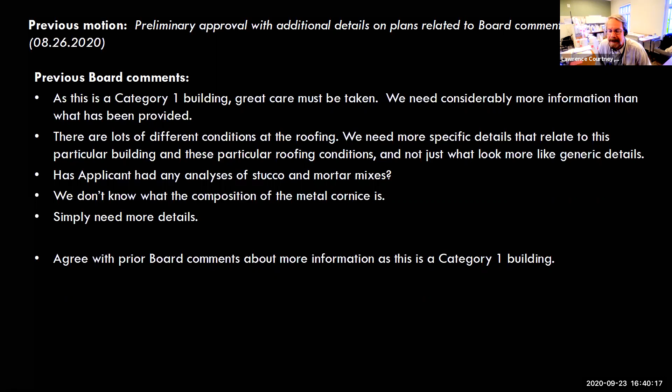Staff comments from that meeting include: this is a Category 1 structure and any work must be considered carefully. It should be noted that the condition of the roofing varies across the shown locations. A more detailed evaluation of the existing conditions should be well documented, and if found to be historic, the Secretary of the Interior Standards for the Treatment of Historic Properties, as well as the National Park Service Preservation Brief number 29, the repair, replacement, and maintenance of historic slate roofs should govern.

Also, it was commented that while there is no information given on the roof, the previous staff comments indicate that it is likely of Hurricane Hugo era vintage. If further investigation finds it to be historic, the roofing should remain and be repaired in place to the extent possible per the documents noted above. If removal is necessary, it should be done carefully with the reuse of as much of the existing slate roofing as possible, supplementing it with similar material.

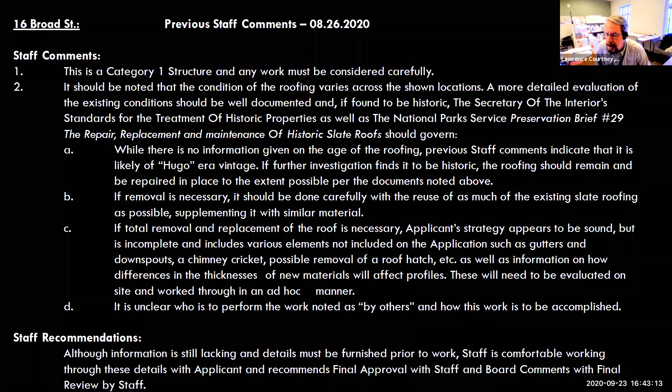And with that, I will turn it over to Mr. Johnston.

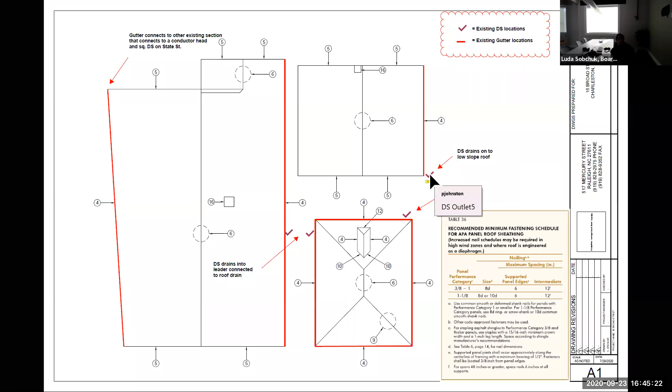There is also one other downspout on the hip roof section at the northeast corner, which also drains into a low slope roof drain and is not visible from the ground. The east side of that small section in the top right corner has one downspout that drains onto the low slope roof there, which would also be replaced. That is possibly visible from the street, from East Bay Street, but I was not able to see it from the street given the trees at the time I checked it out last week.

Other details have not changed. The detail page originally provided contains specific details to this project taken from measurements we took on site. The part of the scope that says work to be done by others, we have addressed that.

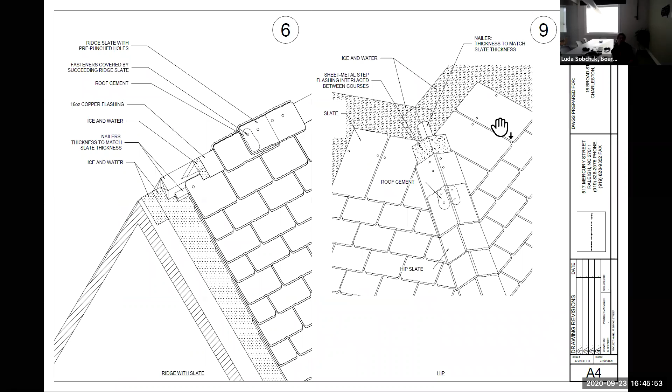Mashburn is actually not going to be doing any physical work. Anything having to do with additional work would be masonry and/or stucco, and that will be handled by our in-house restoration department. I was on site today with Jim Smith from our restoration department to review what we found there.

There's only that one center roof, hip roof area that has bricks below the drip edge. Given the current condition, we don't see any need to replace bricks where the drip edge goes. There are two small cracks at each end, which may be filled or repaired using Type O mortar in regards to National Park Service standards for masonry repairs.

The other roof section that has a stucco chimney will most likely need repairs. There are some previous repairs done poorly there, not by us or anyone we know currently, but repairs will need to be done for the step flashing and the previous work, using stucco approved by National Park Service standards for stucco repairs.

This is not my field or my scope. Jim Smith, who works for Baker Restoration, knows this quite well and is very familiar with these processes. So anything that needs to be done would be run through him in order to be completed.

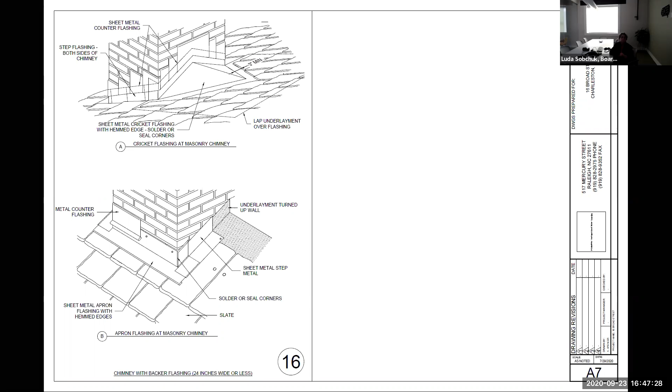Otherwise, there's really no change. We still intend to remove all the slate and replace it with new Buckingham slate for a couple of reasons: warranty, unknowns as far as what we can reuse, and possibly costing the owner more money because we've had to buy more slate. Overall, cost makes much more sense to replace all of it and know that we have a warranty and a well-installed roof.

As far as differences in elevations or planes, there shouldn't really be anything noticeably different. There's a half-inch layer of CDX being added. That will be accounted for around one brick chimney with new step flashing and counter flashing, as shown in detail 16.

As well as one dormer on the hip roof area that has slate on the sidewalls, but that slate will be replaced also, with new step flashing there as well. Overall, I believe that is all the details we need to provide. We have good details on the valleys, drip edge attachments, counter flashings, crickets, and gutters as well. We look forward to getting this project started.

Great. Any questions from the board or staff?

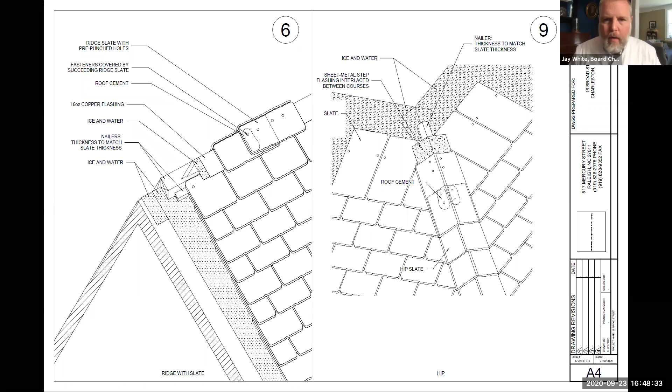You mentioned that you had someone on your staff that knew about this historic work, but the mortars, stuccos, and materials need to be approved by the staff, not by your in-house person. So that needs to be submitted for approval to the staff, Peter.

Okay, we don't really have a way to get at that area right now. Not having it, no, just when you get to it. Okay, yeah, I understand what you're saying.

I had a question for city staff. This is rated as a Category 1 property. Have we determined why that is, what the rationale for that rating was? I did ask Ms. Bennett about that, and she said it was largely due to the ages of the buildings, and that there was likely something historic that happened here. We aren't quite sure what that might have been at this time.

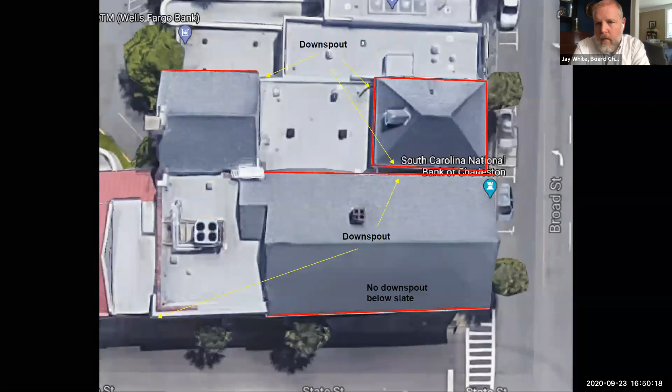Any other questions from the board or staff? All right, hearing none. Any public comment on this application? No public comment on this one. All right, what's the city's recommendation?

Well, these are very similar to last time's. This is a Category 1 structure, and any work must be considered carefully. It has been noted that conditions of the roofing vary across the shown locations. A more detailed evaluation of existing conditions should be well documented as the work progresses, and if found to be historic, the Secretary of the Interior Standards, as well as the National Park Service Preservation Brief number 29, the repair, replacement, and maintenance of historic slate roofs, should govern.

While it is believed that the roofing is largely of Hurricane Hugo era vintage, if further investigation finds portions to be historic, the roofing should remain and be repaired in place to the extent possible per the standards and brief noted above. If removal is necessary, it should be done carefully with reuse of as much of the existing slate roofing as possible, supplementing it with similar material. If total removal and replacement of the roof is necessary, the applicant's strategy appears to be sound.

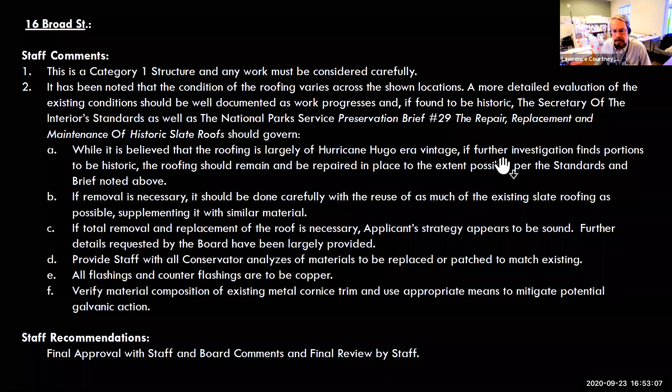Okay, Mr. Johnston, do you have any clarification you'd like to offer to the city recommendation? No, I will say we had an asbestos test done on underlayments. They were not found to be asbestos containing materials, for whatever that's worth as far as the age of the roofing material that's on there. There have been numerous repairs done, so some look a little different in areas, but overall the roof is pretty much all the same slate and condition.

As far as the cornice, I was looking at that today, also this afternoon. Currently, the way the cornice is installed and the way the current drip edge and gutter is installed, there is no actual connection between the two, which we would intend to keep with the new gutter hangers and drip edge. If it was found that it somehow was going to connect, we would find a way to mitigate that and put a slip sheet between the two to reduce the chance of reaction. But from what I can see on site, there is no connection between the two currently. All flashings, as you said, are spec'd with copper. I don't think there's anything else I really need to clarify for that.

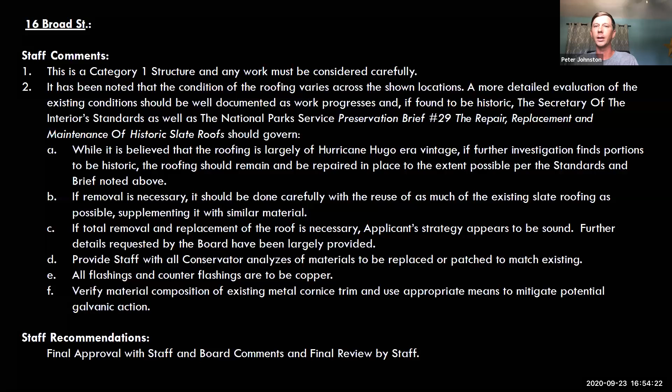Okay, thank you. All right, board discussion. Do you want a motion, Jack? Yeah, that'd be fine if you want to introduce a motion. I make a motion for approval, final approval with staff and board comments and final review by staff.

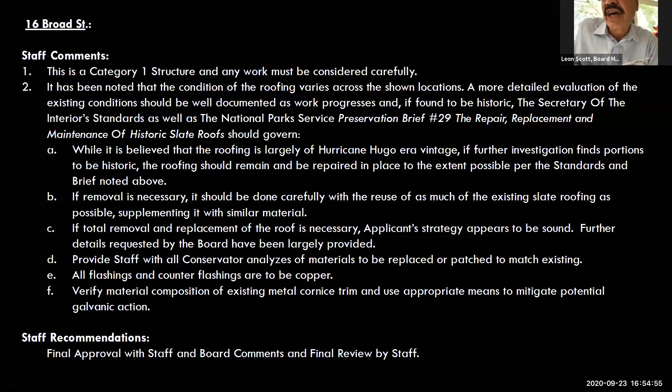This is Leon Scott, I will second that. Okay, so we have a motion made by Mr. Metters, seconded by Mr. Scott, for final approval with staff comments and final review by staff. Made and seconded. Ms. Sobchuk, how do you vote? Yay, in favor. Mr. Scott? Yay, in favor. Mr. Metters? Yay, in favor. And I will vote yay in favor as well. The motion carries 4-0.

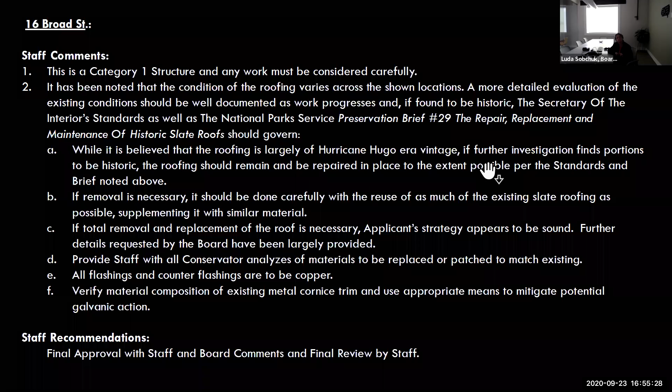Second and last on the agenda for this evening is 480 East Bay Street, requesting conceptual approval for renovation of the east portion of the building and a new plaza along the north portion. This is not rated. It's not in a specific neighborhood. It is circa 1944 to '51, as well as post-1955. It's in the old and historic district.

This is a site context photo looking at the site towards the east from East Bay Street. This is the eastern portion of the building that will be renovated. The plaza is in this area right here. And this is the east portion of the building to be renovated. It is now a dry cleaners. And with that, we will turn it over to the applicant.

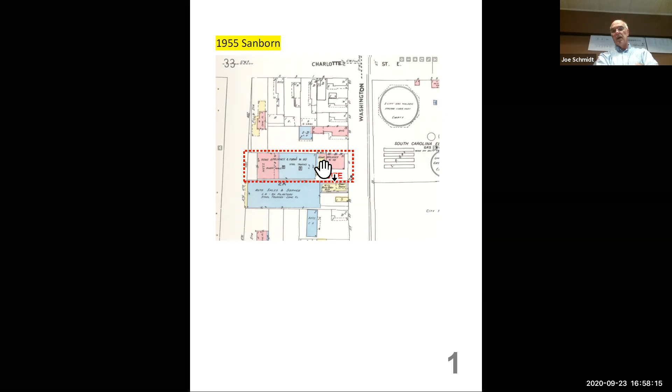Joe Schmidt, Evans and Schmidt Architects. This property is on East Bay. It's bordered by East Bay, Charlotte, and Washington Street. It is adjacent to the Gateway office building, which is a complex of two buildings on the corner of East Bay and Calhoun Street.

With the advent of COVID, things have changed, and we're trying to adapt this shopping center to meet those changes in the future, bring some life back to this property. What we propose to do, after checking with zoning, is remove 11 parking spaces directly up against the building. You literally pull your car bumper all the way up to the storefronts, and it's not very appealing for anybody else coming into the spaces.

At the same time, the dry cleaner asked to close their business, and that gave us the ability to pursue this as a pedestrian interaction plaza, where the 11 cars are being removed, and convert the dry cleaner into 2 retail spaces. The ultimate goal is to breathe life into this property and put in, hopefully, tenants who will support the day-to-day needs of the tenants in the office building. In other words, we're specifically going to be looking for coffee shops, small groceries, vegetables, anything, and a dry cleaner again - anything that's conducive to helping those tenants want to stay in that building at Gateway.

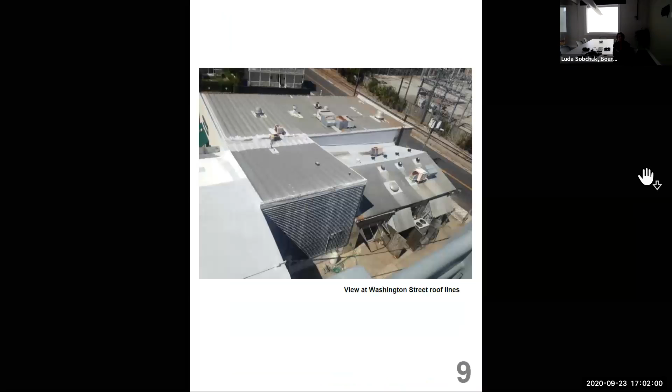If you will go to panel 12 - this is probably the quickest and easiest way to understand what we're talking about. You can see where we've taken out the parking spaces, and we've got patterns of brick pavers to be put down in that location. Now, we do not have the elevation to create a normal plaza where we're stepping off the sidewalk or plaza 6 inches down onto the parking lot, because the parking lot is dead level up against the building, where you just walk right into it.

So we're actually going to have to remove the asphalt and let the brick pavers in flush with where the asphalt is now, with a slight rise to it. But that meant at the outer face along the 3 arrows that say plaza renovation, we needed something to keep cars from jumping up and hitting anybody on our plaza. So we came up with the idea of putting in canopy shading devices in planters, and those planters serve as our bollards, as our definition wall from the parking lot.

So anybody that pulls in too quickly doesn't jump up onto our plaza, because the best condition we could possibly get is about 2.5 inches difference between the height of the asphalt in the rest of the parking lot and our plaza. Otherwise, we'd be tipping the water back toward the building. So every one of these was sequentially a generator for what we're trying to propose to do here.

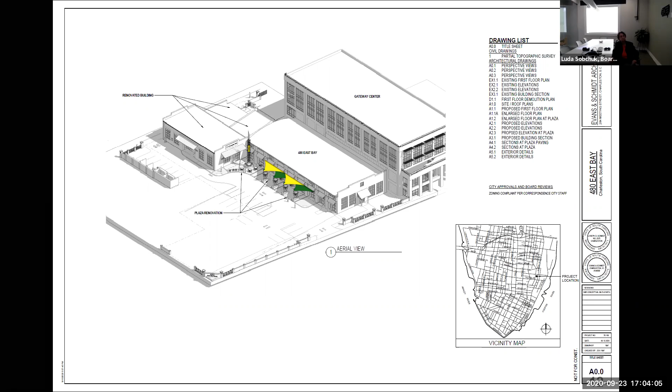In the corner, the inside corner there, we wanted to put in something to signify this property. This is all owned by John Rivers Foundation. They were Channel 5, WCSC, and the radio station. They've been across the street since the inception, the first broadcasting company in Charleston. So that is a cultural type piece to help draw attention to the site and designate this property as being part of it.

It's meant to actually generate some questions - what is the purpose of that, why is it there, is it just purely sculptural? It's sort of a token representation of the family's business, which we'll show later in the presentation.

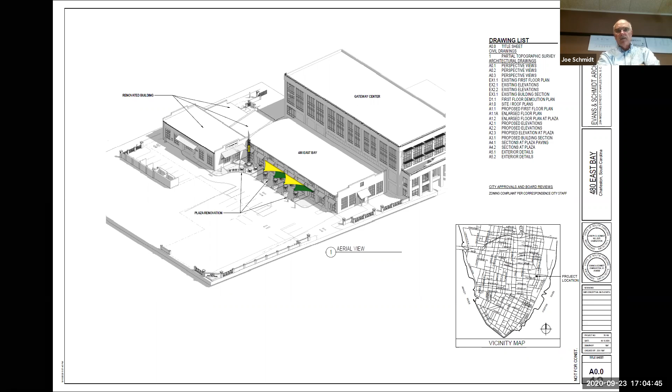The arrows you see - this really doesn't show it. Let's go to 14, panel 14. One more, there you go.

The block wall you see, the stucco wall on the top of the screen, that is an existing wall. It's stucco with pilasters and little cast balls on top of them. We're leaving that piece of wall, but taking out a small section of it.

Here's where we're starting to replicate the fence work, the ironwork, and the stucco of the gateway down the way. It has that same X pattern, similarly to the one in front of the bank, which remains up on the corner to the right side of the top of your screen. This is not part of that project - that's intact, except we're proposing that fence work.

That's correct - these are the same curb cuts coming into the property. In any case, we're changing the look of the east end by putting on a fixed canopy in that location and a parapet pop-up on that building to give it some prominence. That will house two different establishments. We also have a similar awning on the side of the building, as shown to the far left on the bottom of the screen.

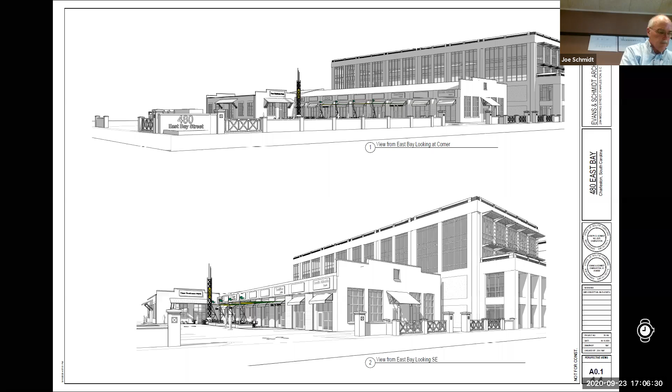I'm thinking there's a better place to look at that - well, go to 15, if you don't mind. A little closer, that's okay. This is jumping, that's not me - it's usually me doing this. All right, let's try something else here because it's not really wanting to stay on that slide.

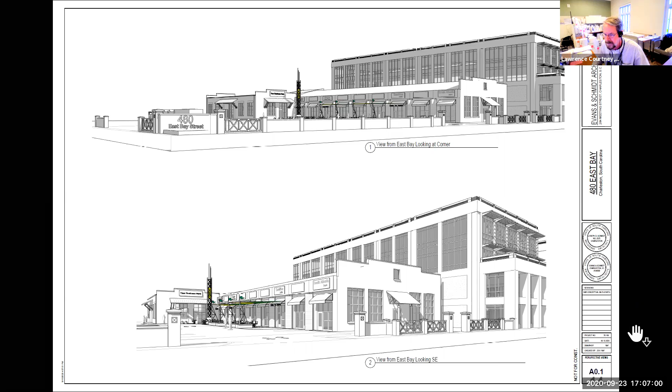There you go, it's pretty good because it gives you a street level view. You can see what I'm saying - that's literal, you're looking at the curb jump up from the brick plaza to the asphalt. It's only about 2 inches, and there's not much more we can do with that. The nice thing we'll get out of the brick plaza and removing the asphalt is a pervious surface, making it less likely for water to get into these shops as it has in the past. That's the purpose.

That was the generator for those tent canopies. We literally put the brace on it so that we did not have to put them out at an angle and project over the parking. There's an inference that they're almost like little sailboat sails, which we thought was a good way to include the buttress.

If you will, go to 16. This would be the views from Washington Street. Remember, you saw the barbed wire and so forth - instead, we'd be cutting holes, windows in that side of the building. These would be done in aluminum, but in the same kind of pattern as the window opening panels on the existing building further forward to East Bay Street.

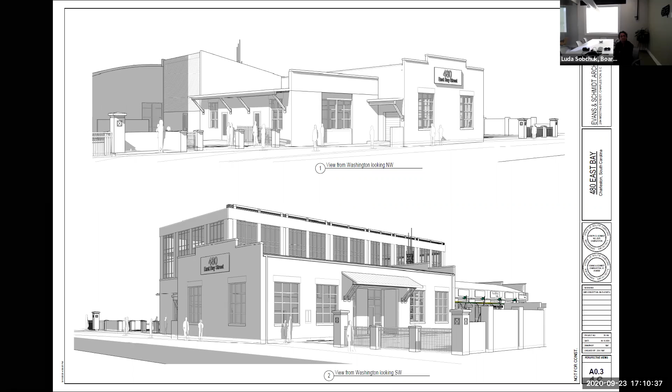If you go to 26... Mr. Schmidt, I trust you're reaching the end of your presentation.

I've just, if you just look at 26 and 27, it's sort of straight on views, if you didn't like it in the ISOs.

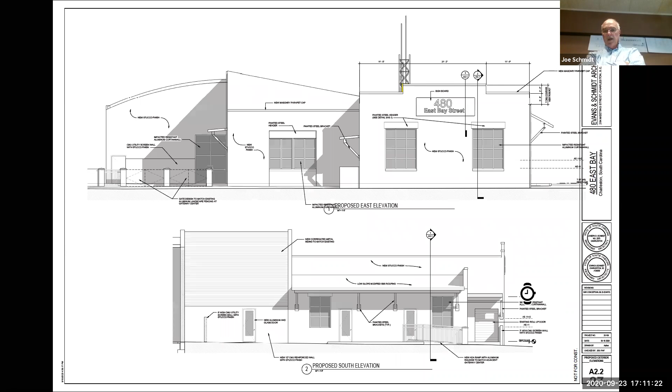A full plan is on, maybe we leave it there, is on 25, gives you the plan of the plaza. We do not have tenants for the dry cleaner space at the moment.

However, nobody's interested in being a tenant or getting other tenants in there until they know if this is a concept. So we would want to break this into 2 phases: work on the plaza ideas first, get the permits, get it in place, and that's going to attract the tenants. So it's very important that we come through this conceptual phase, even though we've shown you ideas of what the back building might be. Again, it might change. If it was only 1 tenant, we wouldn't have as many doors and so forth and so on.

So with that, I will turn it back over. Thank you very much. Okay. Yeah, absolutely. Any questions of the applicant from board or staff?

This is Luda Sobchuk.

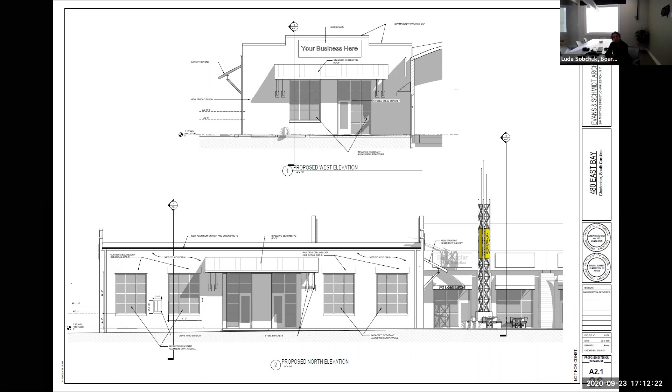Are you leaving those, keeping those odd curved pilasters on the building? We are. They actually were added in the late 70s, I believe.

Right, and they were pulling their brick, laid up in a stack bond, and they were actually starting to fall away from the building. We talked about what to do about this and what else we would do. Well, anything we did was just not... it looks like an industrial garage building.

They were actually a good distraction. So instead, we brought in ramjack type people, I'm not sure which company it was, and had them fixed and pulled back to the building because they were falling away. They add an interest, and actually they do serve a good purpose. They give it some scale, and the little indents you see at the back edge hide the downspouts coming down the building.

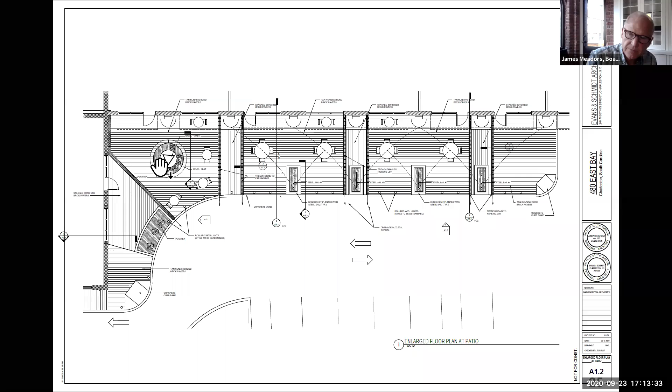Joe, it's James Meadors. The antenna that you're showing on the plan, there was not an antenna in that location. It was from across the street. It was across. It still is across the street. Correct, that's all that's left.

Now we're just thinking of it as sculptural. Obviously, it serves no other functional purpose than a piece of sculpture in a plaza. What would it be? And we said, well, what else would it be? It would be something that had to do with the broadcasting business.

Any other questions? If not, do we have any public comment for this application? Just one letter to be read.

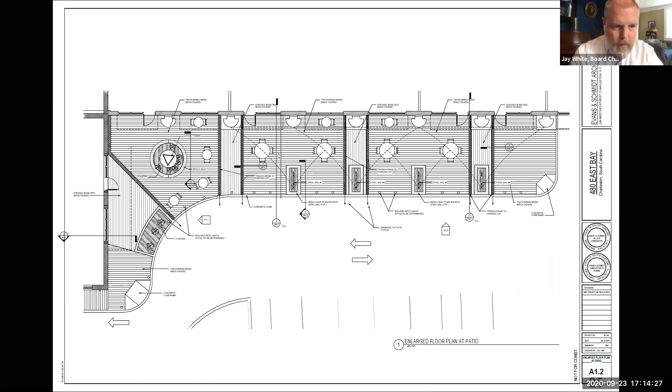Uh-oh, that was a letter you sent to me. Yeah, it should be in your email. It's also in the Dropbox if it's there, or if you can access it there. Yeah, I'll just pull it up there. I'm sorry to not be prepared for that. I apologize, I should have, here I was trying to be Johnny on the spot, and well, I'm not that. So this is from the Preservation Society, I suppose. Let me pull this up. It will eventually appear. Here we go.

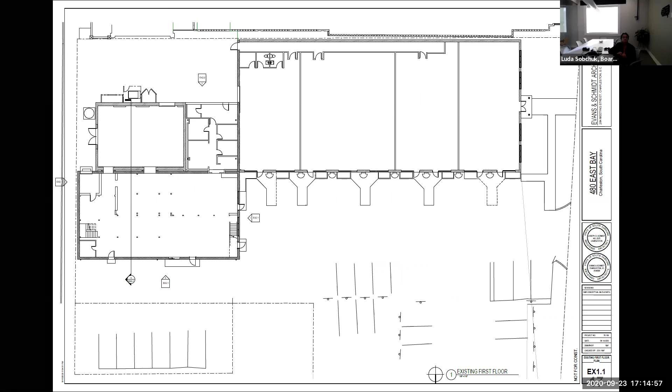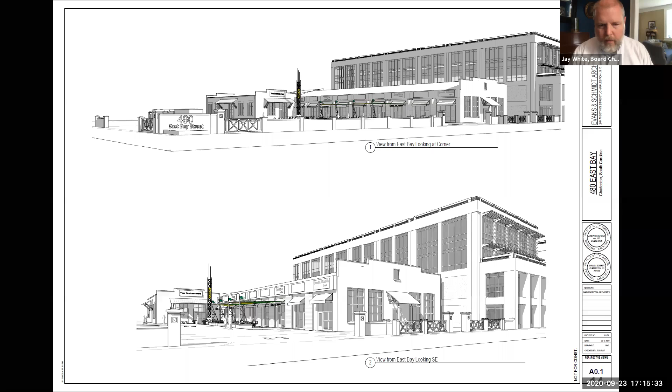This is from the Preservation Society of Charleston to the board members. The Preservation Society has had an opportunity to review the proposed plans for alterations to the one-story commercial building at 480 East Bay. We feel the proposed design is well conceived, and are particularly favorable to creating a new activated seating area along the storefront, as well as altering the rear of the building to facilitate new commercial uses facing Washington Street. We write this letter to express our support for the project, which we believe will provide a significant improvement to this building and the overall context. Sincerely, Erin Minnigan, Director of Historic Preservation.

All right, so sorry I was behind the 8 ball on that. There's no other public comment. Then we will move on to city comments and recommendation.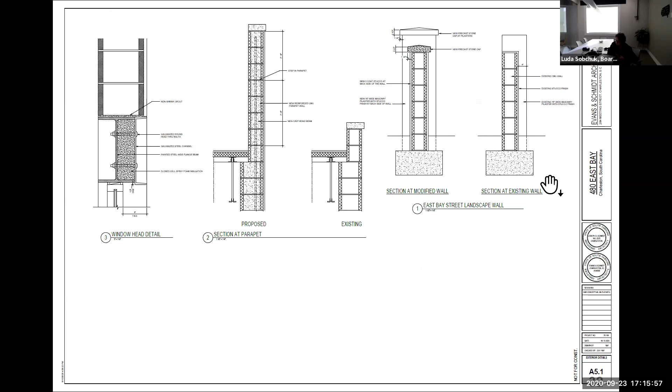Generally, staff likes this project.

Buildings on the site underwent significant change or replacement during the mid part of last century. Buildings that now exist on the site are simple in form, and they're primarily utilitarian functions.

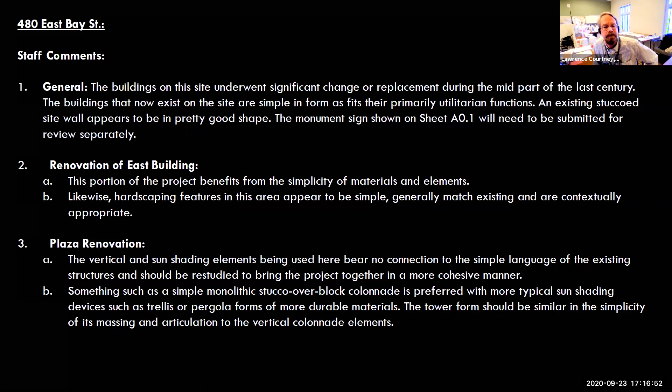An existing stucco site wall appears to be in pretty good shape. The monument sign shown on sheet A0.1 will need to be submitted for review separately.

Renovation of the east building. This portion of the project benefits from the simplicity of its materials and elements. Likewise, hardscaping features in this area appear to be simple, generally matching existing, and are contextually appropriate.

Plaza renovation. The vertical and sunshade elements being used here bear no connection to the simple language of the existing structures and should be restudied to bring the project together in a more cohesive manner.

Something such, maybe something as simple as a monolithic stuccoed CMU colonnade is preferred, with more typical sun shading devices such as trellis or pergola forms of more durable materials. The tower form, we really didn't understand it.

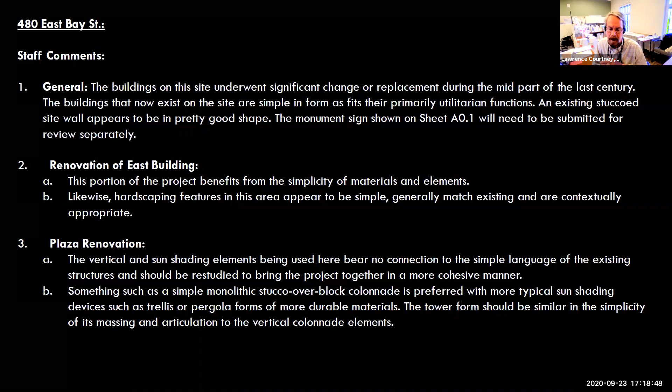The plaza, we like the specialty paving, planters, and wall hardscape features in this area appear to be of good design and quality. New walls generally match existing and are simple and contextually appropriate.

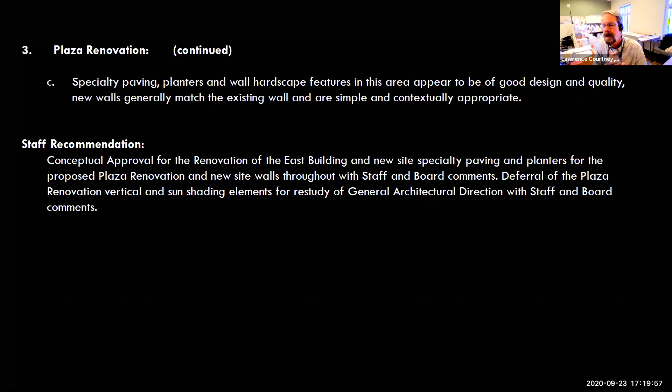Our recommendation is for conceptual approval for the renovation of the east building and the new site, specialty paving and planters for the proposed plaza renovation and new site walls throughout, with staff and board comments, and deferral of the plaza renovation vertical and sun shading elements for restudy of the general architectural direction with staff and board comments.

Okay, does the applicant have any response to public comment or the city's comments?

I would like to add something that I hadn't mentioned before. Clearly, and I know we don't like this word, but architecturally, let's put it that way, not economically, but architecturally, this is not the highest and best use of this site. And so this project was looked at with the point of view of maybe a 5 to 10 year window that this building would remain here and wait and see what else develops based on what's happening on East Bay Street already.

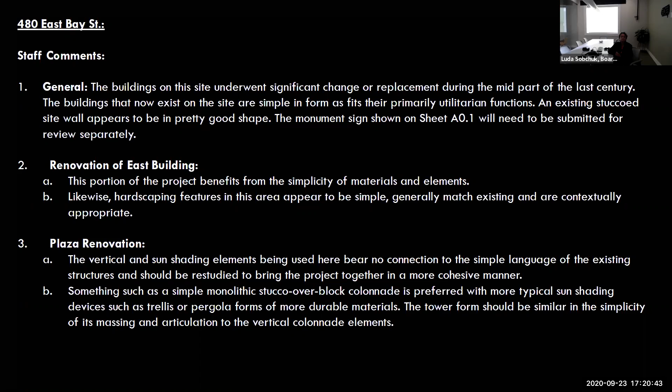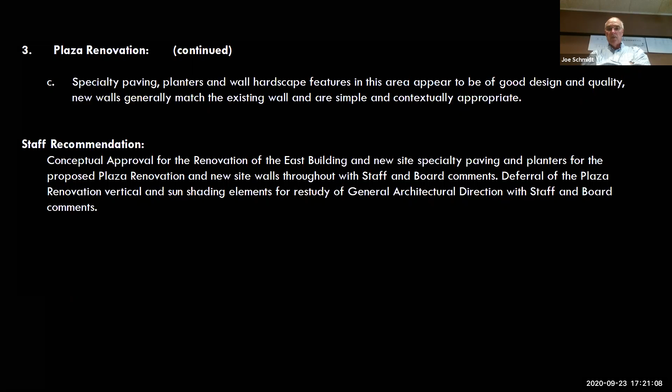So we didn't really want it to, we weren't concerned about using the canvas, for instance. We knew it had a lifespan of that. The idea of bringing in other trellis type things, it just didn't seem to fit at all with the concept of this industrial nature of this. So really thought we were on a better track than the city does, but that's just an opinion, and we defer to you. Okay, well, with that said, board discussion.

This is Luda Sobchuk. I actually like the approach of the design. I like that this really kind of utilitarian building is getting uplift with the color and lightness of adding the metal structure, kind of nautical structure with the canvases, and bringing animation to this and inviting entrances to the future little shops and things like that.

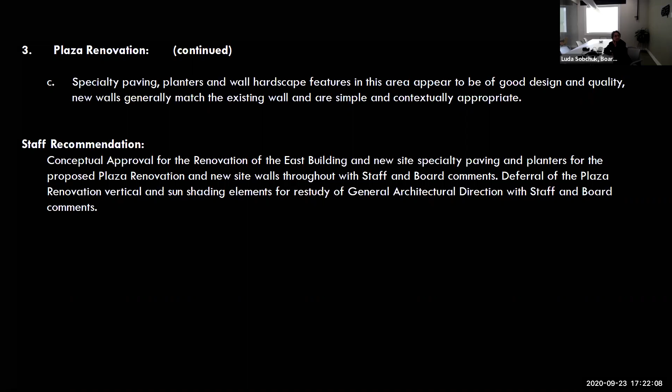So that's kind of one thing. I think bringing that sculptural element is also a plus to animate that plaza, creating the plaza. And I also have a question, is there any possibility to add any trees on the parking to have it even more together, parking and those structures? That's kind of it.

Am I on, responding? Yeah, go ahead and respond to the question about the trees, if you don't mind. Yes. What they want to do is plant an avenue of about 20-foot high palm trees along East Bay, along that fence line there, to create a foreground.

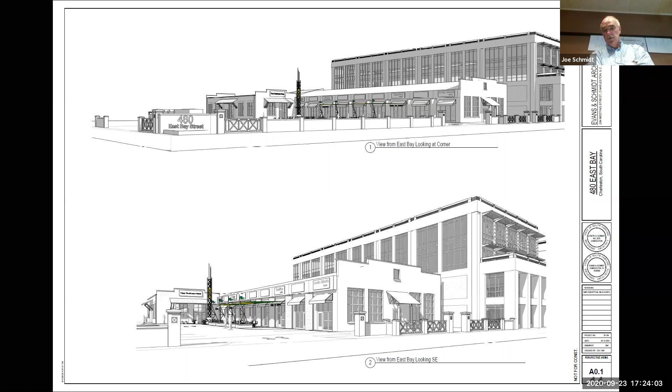As for the sails, we've done this down on King Street years ago. Right now it's AW Shucks. And it's hard to get the computer to render it right, but it's amazing what happens when you take them. They're never flat. You take them and distort them and pick up one corner, and you get all these interesting views as the light and air goes through.

The higher we kept putting them to try to make it show up more, the more we were getting in conflict with, I'll call it, the parapet up there, the signage parapet at the top of this building. But I think there's some room to play with that to give it a little bit more slope.

The biggest way to get the interest is you think of it as a flat plane, and then you start tipping one corner, and the distortion in a triangle is very interesting, how that works. So it creates a lot of interest for the eye. The reason we were so positive on doing this versus trellises and so forth is we wanted this to look festive, like outdoor dining, more like a street fair, if you will, as much as we could in what used to be a parking lot.

Thank you, and that's how I perceive this design too. All right, any other board comment? Yeah, Jay, I got...

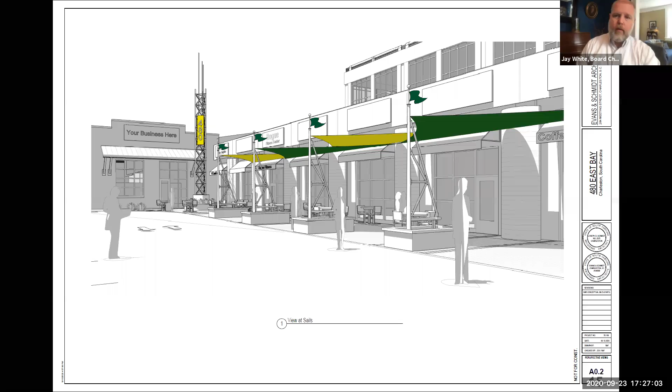All right, I'll hop in quickly and say that I totally understand the scope and context of a refresh like this to a building typology that really doesn't belong in the historic district, but yet here it is. This model of refreshing an existing property is not foreign to Charleston. This is happening all over the Upper Peninsula, under the same sort of economic context. So we do understand that. I'm actually fine with this proposal. In situations like this, I think about, well, are we doing any harm to the historic fabric of Charleston with a proposal such as this, or are we doing any harm to the building itself? And I don't think either one is true. I think it's a pretty benign application, and I'm completely fine with it.

Any other comments or a motion? No, this is Leon. I think it's well done, and I'm in agreement with the board's comments. Everyone, ditto. I think it looks fantastic. So I'm fine. That's it.

And I'm going to add again, this type of approach to addressing the issue with a really boring building in a sense is done all the time in historic cities through Europe, and it's very successful actually. It draws people to it rather than otherwise. So there's nothing wrong with having something like that in this location. And in the end, it's also conducive to the fact that it could be replaced in another 5 years with a new approach. So anyway, I'm really supporting this application right now. I agree.

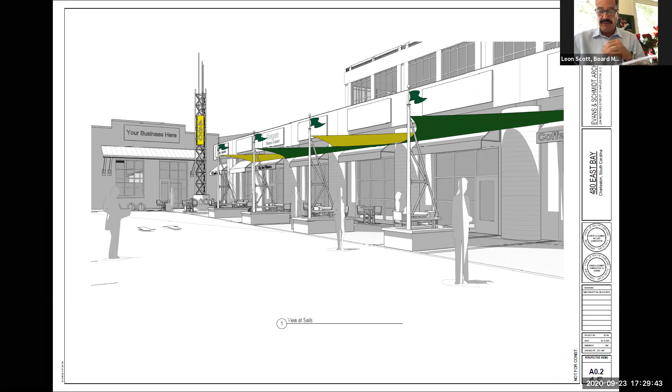Okay, do we have a motion? Okay, Jay, this is Leon Scott. So I make a motion for conceptual approval for the renovation of the existing building, new site, and deferral on the plaza renovations. Okay, so that's pending staff approval.

Well, so it seemed like from the board discussion that there was some consensus about the plaza renovations, which include all these little vertical elements and sunshades, as being acceptable. If that is the tenor of the board, then that would probably point more towards a conceptual approval with staff comments rather than a deferral. Then I'm with that, that's the conceptual approval for the project, for the site and the plaza.

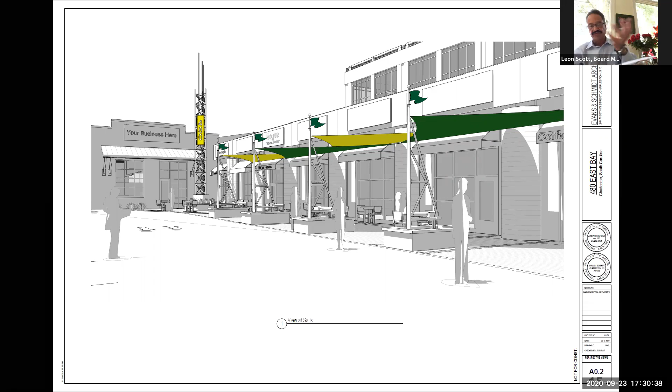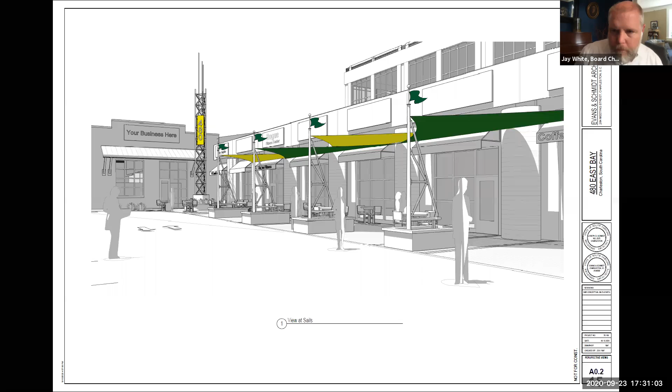All right, so we have a motion for conceptual approval of the project. Do I have a second? I second. Okay, with the motion by Scott, second by Subcheck, I'll call the roll. Mr. Metters, how do you vote? Nay. All right, Ms. Subcheck. Yay. Approval. Okay, Mr. Scott. Yay, in favor. All right, and I'll vote yay in favor. So the motion carries 3-1.